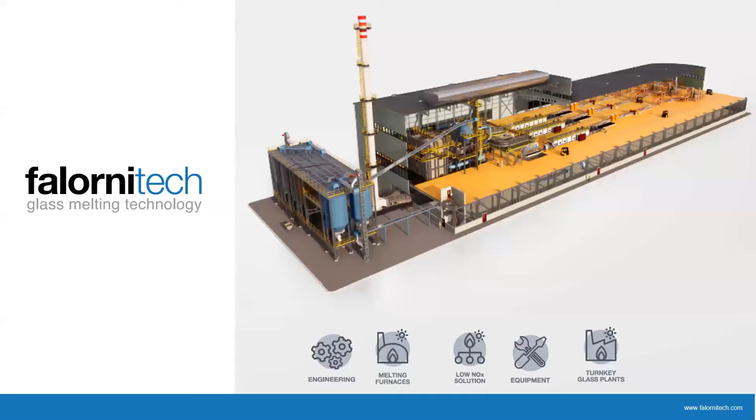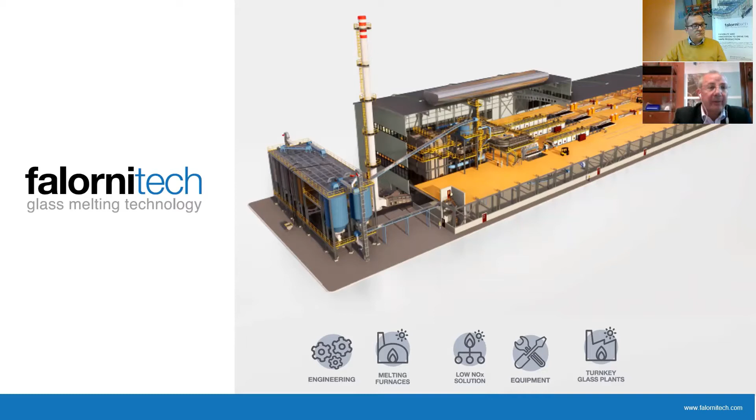Good morning to everybody and welcome to this webinar organized by Glass International, the topic of which is the sustainability in glass melting. I am Andrea Zucconi and I am the commercial director of the company Falorni Tech. I will talk about the Falorni Tech company, of course, and I will give an overview of the Mexican market.

Good morning. I am Francesco Prosperi. I'm the technical director of Falorni Tech, and I will talk about the second part of this webinar relative to the sustainability in glass melting and the conclusion on how we can perform a sustainable choice.

Here we are with the first part of the presentation, we talk about Falorni Tech. Who's Falorni Tech? An integrator of melting and conditioning technologies for the glass industry. In particular, we deliver solutions like engineering for furnaces and conditioning systems, all the equipment related, and the technical services.

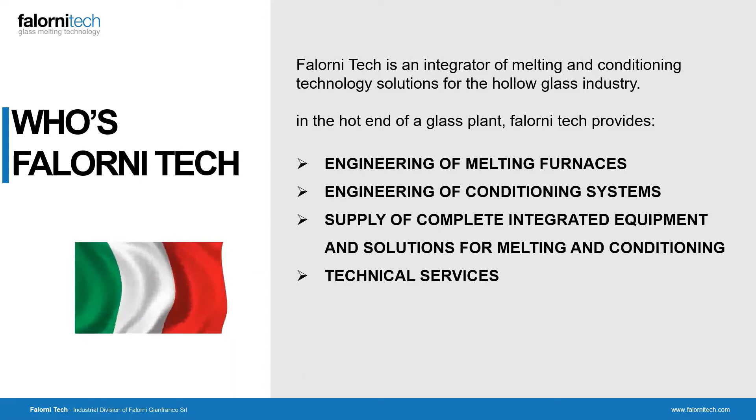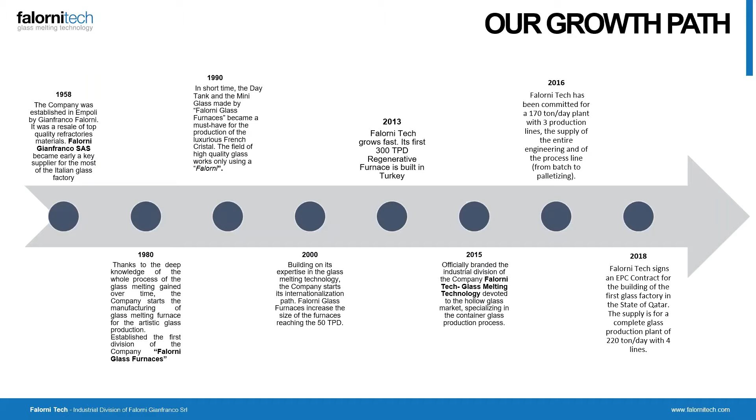We started to work in 1958 in the region of Empoli, near Florence, a region rich in tradition in glass making. In the next years, we have developed capability and knowledge to deliver also furnaces of big capacity up to complete plants as we do today. We can deliver furnaces for all kinds of glass and furnaces of any kind, like regenerative, recuperative, oxy-fired.

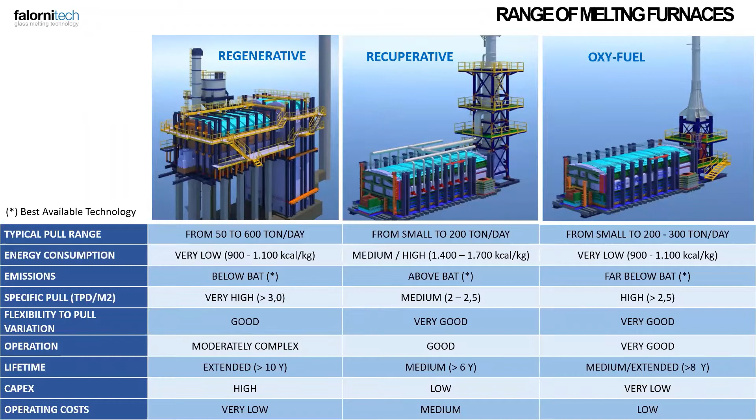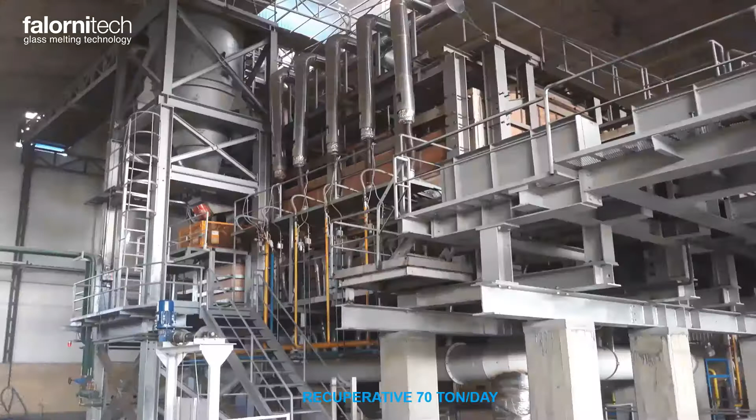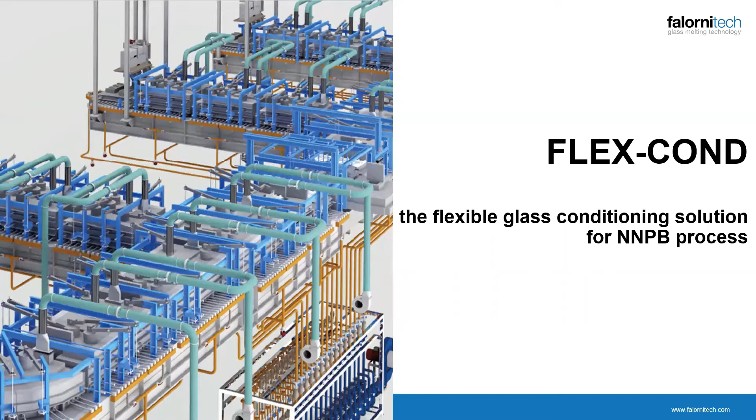Here we have some examples of furnaces, 300 tons per day for container, to 70 tons per day for tubular, and oxy-fuel. Besides this, we offer the FlexCond, the flexible glass conditioning solution of Falorni Tech for the NNPB production and other kinds, which features extremely high performances in terms of thermal homogeneity index and flexibility in operation.

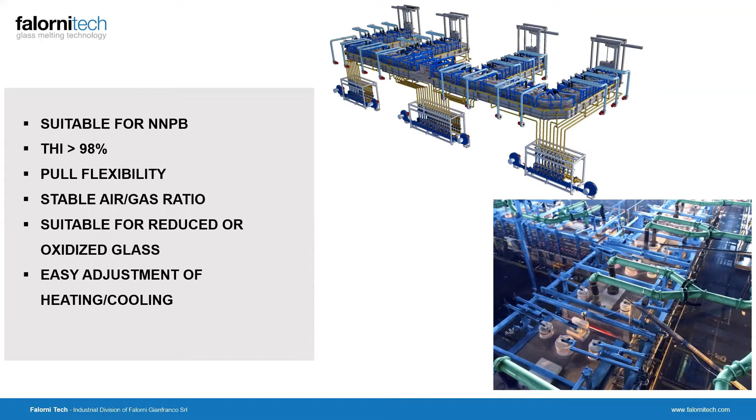Finally, we have the complete range of equipment for the furnace and conditioning, such as the combustion systems with the process automation, recuperators, waste gas management systems, batch chargers and glass levels, bubbling and boosters, systems or cooling systems.

Talking about Mexico and the glass industry of Mexico, we have to say that this is a very important market for Italian companies. We have a strong presence in the country, which has experienced a very impressive growth in recent years, thanks to several environmental conditions, like the proximity with the US market, or the success of Mexican beer, spirits and beverages in the global market.

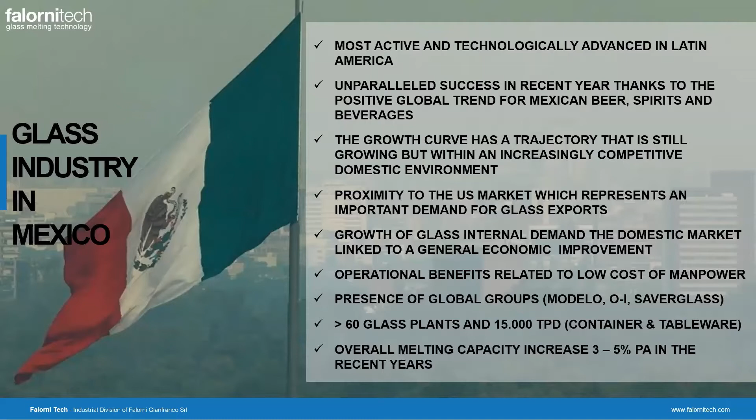Besides this, Mexico is still a country with interesting parameters for the production of glass, such as the manpower or the electric and energy cost, which make global groups like Modelo, Owens Illinois or Saverglass more and more present. In the country, there are more than 60 glass plants in operation and beyond 15,000 tons per day of production, with a constant rate of increase per annum of melting capacity.

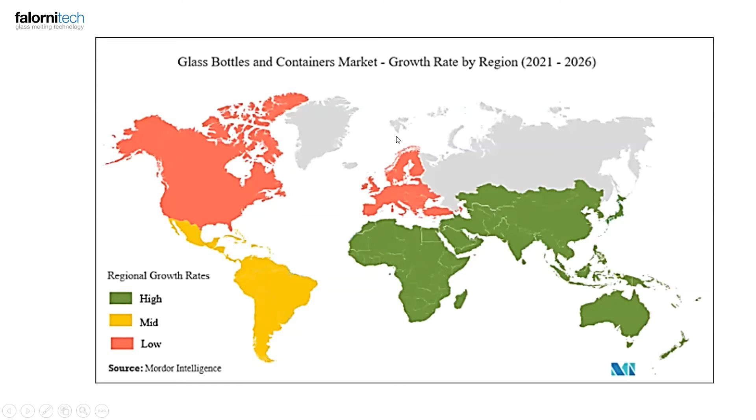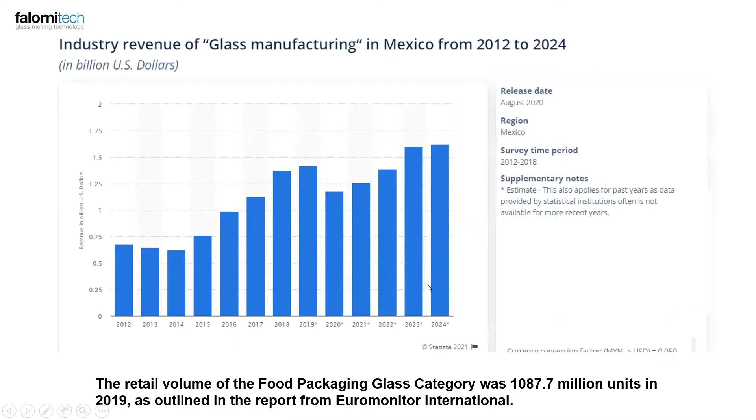The glass bottle and container market grows with a constant rate and is considered in the medium range compared with other regions of the globe. As you see here, the industry revenue in glass manufacturing has experienced a positive trend since 2012 up to 2020 and is expected to grow also up to 2024.

Italy and Mexico have a strong relationship in the market, in the business. Mexico is the 29th market for Italian export and is the 4th target market for Italian export in the Americas.

I give now the speech to Mr. Francesco Prosperi, who will talk about the sustainability in glass melting. Thank you, Andrea, for the speech. So this is the second part. I'm Francesco. I will talk about the sustainability in glass melting.

What do we refer to talking about sustainability? We know that the declination of sustainability is related to and involving different stakeholders. So there are legislators for legal requirements, public opinion for the social sensibility, private companies and customers for customer expectations, and last but not least, the glass company and shareholders for the company necessities.

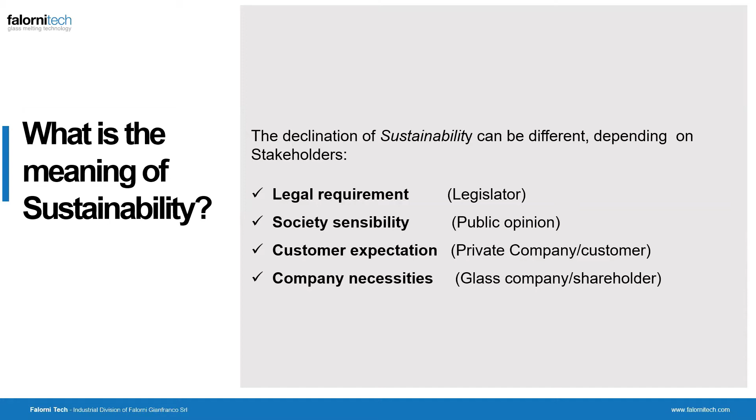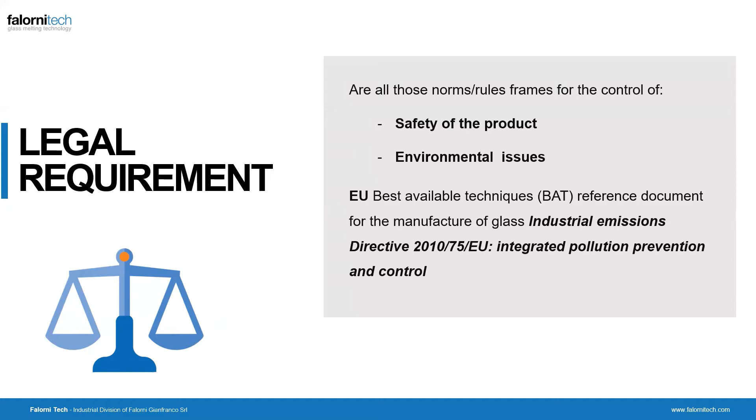If you go through the legal requirements, it's very important that these are related to the safety of the product and now, more and more important, the environmental issues. And on this element, the furnace has a big impact, as we know. And now the European norms, like BAT, make the step for the upgrade and evolution of pollution containment, and will be the reference for the whole world.

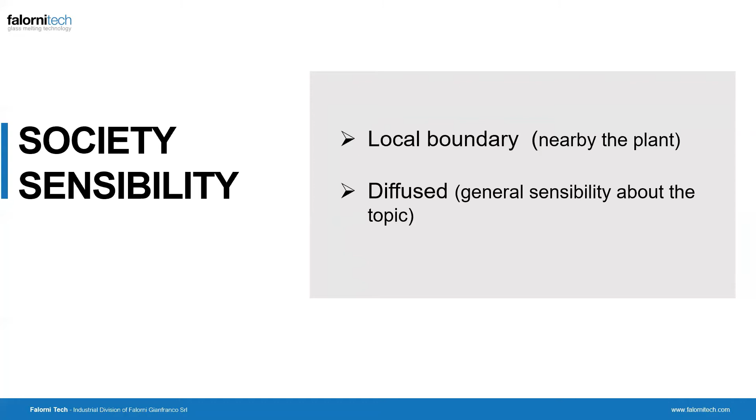The social sensibility as well is very important, and in this case, we define local boundaries, which is a sensibility linked to the people staying nearby a glass plant, and the more diffuse general sensibility linked to the topic of glass. For example, very important nowadays is the feeling about the glass container versus the plastic container.

Customer expectation: clearly, a glass company works to satisfy customer expectations. So these are economical, technical, think about quality and capacity of supply, and also marketing, which are related to the previously identified social sensibility. And then, very important, and this is the topic on which we'll concentrate, are the company necessities. Mostly there are three: economical, flexibility in production capacity, and technical capability.

So when we talk about a sustainable furnace, we have in mind as a reference a best furnace. These are not one against each other, but a sustainable furnace is related to different elements, which go from economics in terms of investment, capex, and operational cost, opex, to technical expectations, so the production necessity, the flexibility already talked about, to meet the range of production and rate of change, and also the legal element in environmental and health and safety.

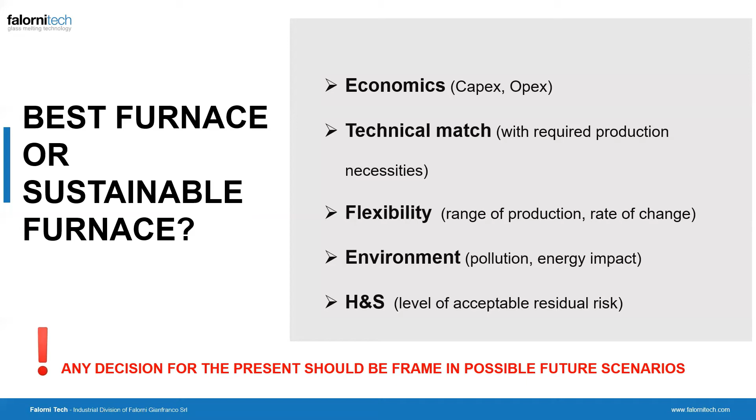Surely any decision made for designing and identifying a melting apparatus must be made in the frame of possible future scenarios, so as not to jeopardize the future existence of the system. So, like all human activities, there is not an absolute choice, but always a choice linked to a concept of sustainability, which is a relative concept.

And which are the key drivers for sustainability? We focus now mainly on the company key drivers, which typically are linked to the economics of the business. So you need a good turnover, you need a payback, you need a good margin. You need also strong reliability for business continuity, meaning that you have no issues coming from quality, interruption of business due to technical problems, or, for example, legal problems, so legal requirements which are not respected. So this is a very important topic.

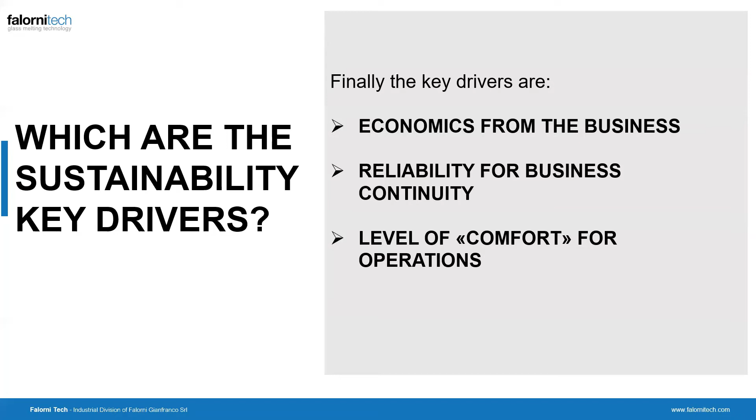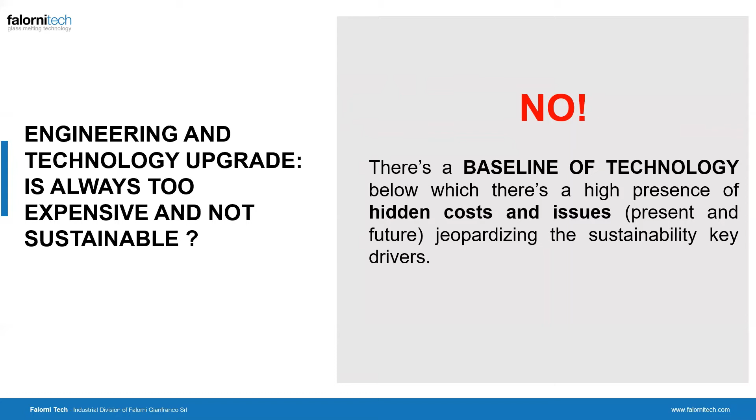And also the level of comfort for operation is very important, because it makes it possible to manage the system in a very good way. But which are the main elements, called key drivers, impacting sustainability? The technology choices surely impact strongly on this. And so the question comes up: are engineering technology upgrades sustainable, or too expensive? We have to consider that it's not like that, because there is a baseline of technology below which hidden cost issues, both present and future, can jeopardize the sustainability of the system, impacting economics, reliability, and other things.

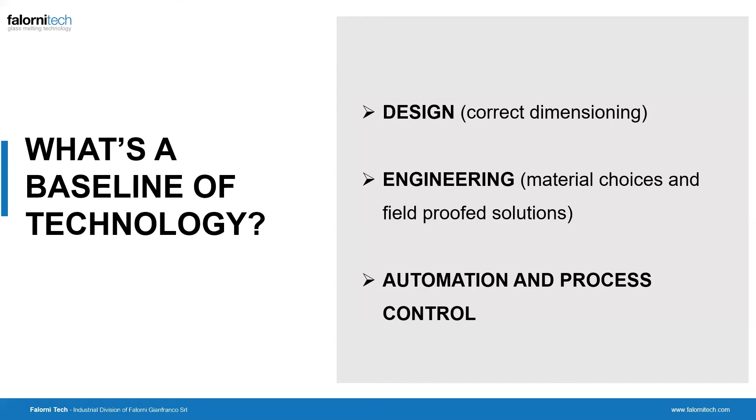So what is the baseline of technology? What do we intend by it? Normally, when you think about the baseline of technology, we have to think about a correct dimensioning design, good engineering, meaning good material choices and field-proven solutions, and last, but very important, automation and process control. How do they impact these things? You have to think that you have a backfall if you don't use this part properly.

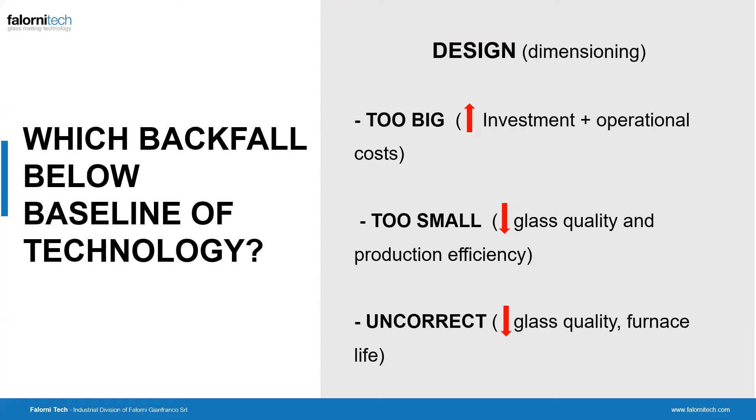For example, in the design, where you choose the dimensioning and the technology, if you make a dimension too big compared to the necessity, you just increase your investment and operational costs. If it's too small, you jeopardize glass quality and production efficiency. If you make a mistake, you can have a negative backfall on glass quality and furnace life. The same with engineering, which is a development of the design: it can impact operational costs, furnace life, and glass quality. So again, it can drive negative impacts on the elements we are interested in for sustainability.

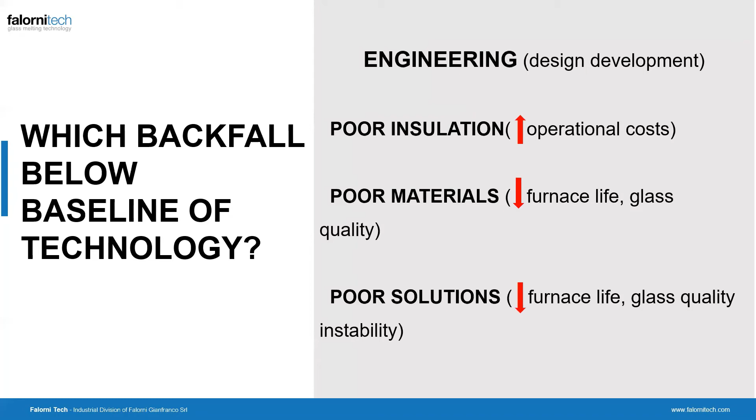Automation, we said, is very important. And we are talking about it because it's not new; this is something which is always considered. A lacking or poor automation system again leads to a big impact on operational cost in terms of energy consumption and maintenance, and can lead to problems on glass quality, stability, and production efficiency. It can also impact the furnace life negatively because of damages.

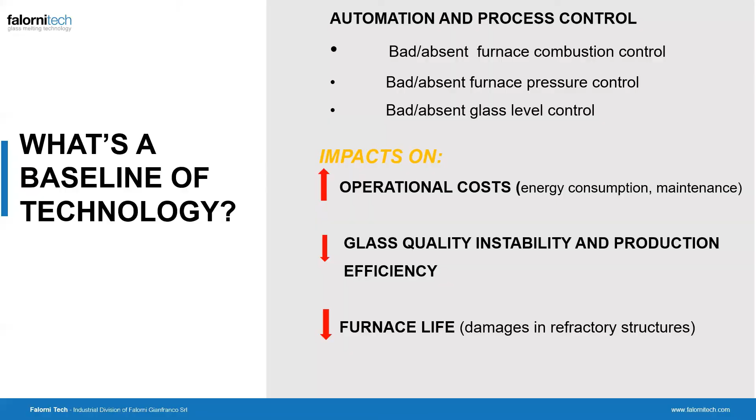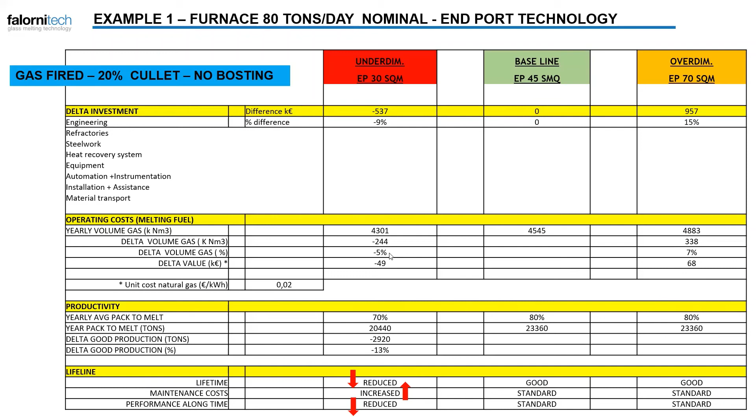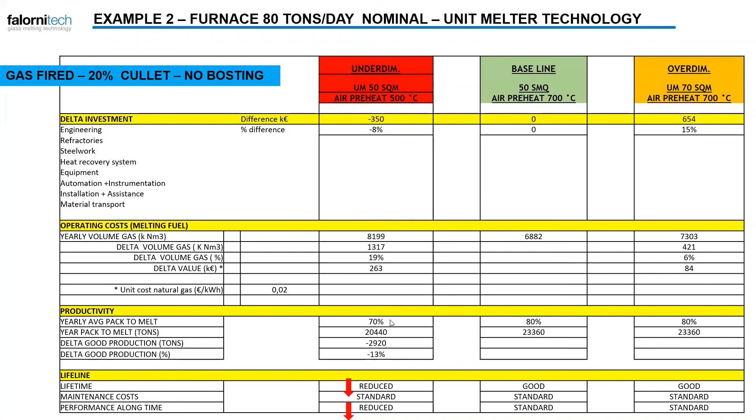If you make a comparison, a cross reference between different technologies, and this is very interesting, important, we can see that starting from the most diffused technology, which is the one of regenerative furnaces, end port, and we go through recuperative to oxygas, thinking also about the sustainable furnace, which is conditioned to meet the expectation, we can see that there are very different values in investment on the different furnaces and a difference in the operational cost. Clearly, the choice will depend on specific necessity requirements.

So if you believe more important the level of capex or the lifetime of the furnace and the payback on investment. So we see that also where we have a higher investment, the operational costs are lower. And so there is a payback of the system, which is different for the different arrangements.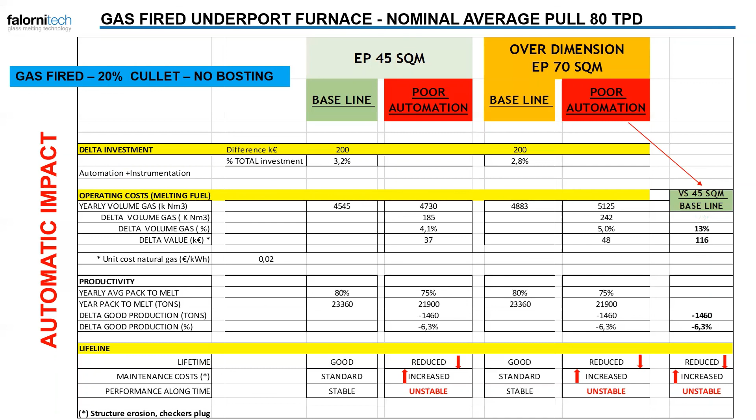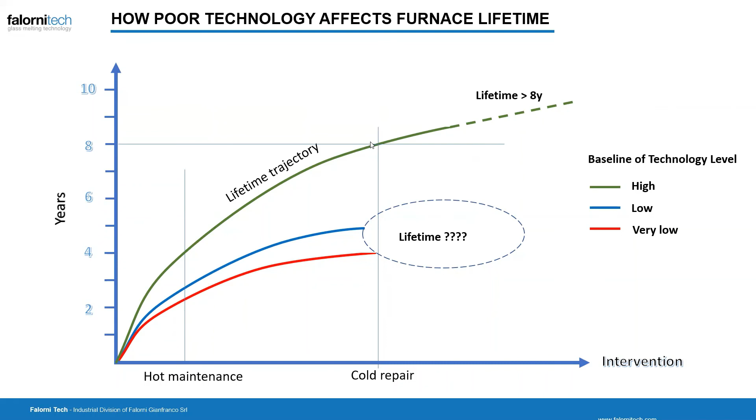Again, the baseline furnace can guarantee in the case of an end port furnace a lifetime of 8 years. This is a reference time. If you go down with a low level of technology, we also have short-interval maintenance interventions, and we also have a shorter lifetime, with a question mark where it will be, but surely shorter than the normal lifetime of a sustainable furnace.

So how to make a sustainable choice? There are three very simple steps: analysis of the background and real necessities; identification of the baseline technology, so identify which kinds of technology must be used fitted to that situation; and identifying the different proposals, making a decision among different possibilities. So to choose the best sustainable furnace.

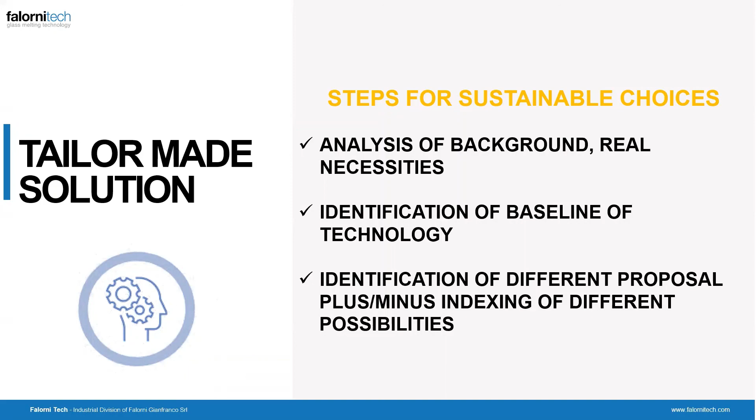So what do you think, that engineering technology upgrades are expensive and not sustainable? It's just like a parallel we normally use and talk about. It's just like education. You can feel it's costly at the beginning, but you can try to do without it, and you can feel what is going to happen.